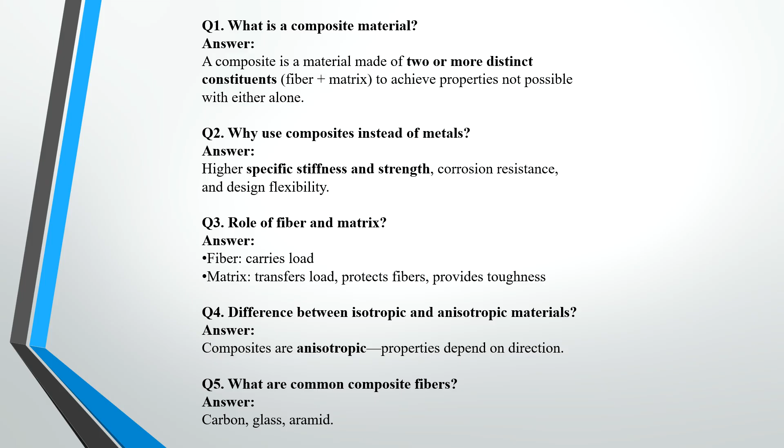Next question is the difference between isotropic and anisotropic materials. Composites are anisotropic; properties depend on the direction. So, what are the common composite fibers? One is glass fiber, carbon fiber, and aramid, which we also call Kevlar. So what are thermoset and thermoplastic composites? Thermoset is non-remeltable and it has very good thermal stability. Thermoplastic is recyclable, tough, and fast processing.

So what is fiber volume fraction? The fraction of fibers in the composite directly controls the stiffness and the strength. Why is void content critical? During manufacturing, some voids will form. So why is the void content important? Because the voids reduce the strength, fatigue life, and the damage tolerance.

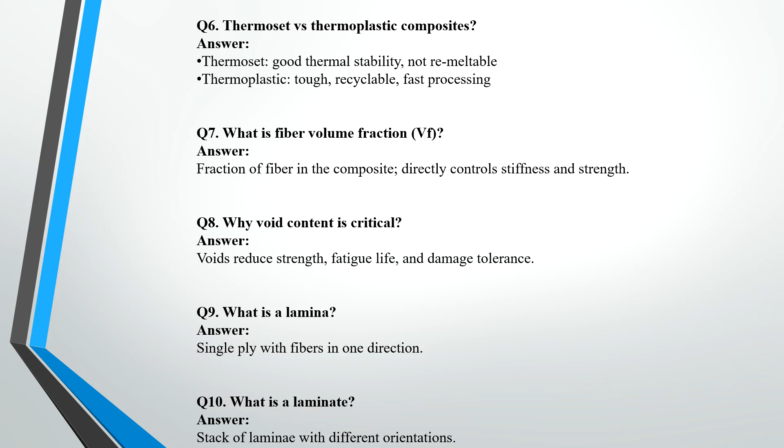So next question is, what is lamina? A lamina is a single ply with fibers in one direction. And a laminate is a stack of laminae with different orientations. So why does ply orientation matter? Because, as I said, this is a direction-dependent property. So it controls the stiffness, strength, and the load path.

And what is a typical fiber orientation in the industries? The typical orientation is 0, plus or minus 45, and 90 degrees. This is also called a quasi-isotropic type of laminate. So this is a common stacking sequence they use in the industries. What is a balanced and symmetric laminate? Balanced means plus or minus theta plies are paired. Symmetric means the plies are mirrored about the mid-plane. Those are called symmetric laminates.

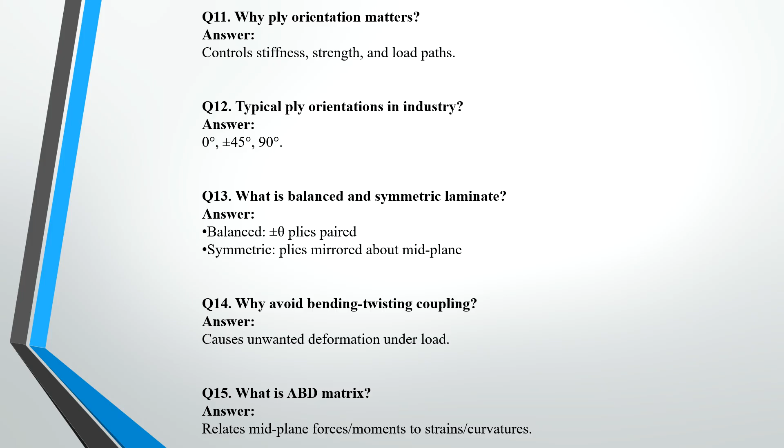Why avoid bending-twisting couplings? Because bending-twisting coupling causes unwanted deformation under load. This is a famous common question they ask in the interview. What is the ABD matrix? It relates the midplane forces or moments to the strains or curvatures. So why is a quasi-isotropic laminate used? Because it provides almost isotropic in-plane behavior. That's why in aerospace industries they use quasi-isotropic laminates.

And what are common composite manufacturing processes? There are many manufacturing techniques. The common ones are hand layup, autoclave, RTM or resin transfer molding, filament winding, and automated fiber placement, AFP. Autoclave versus out of autoclave. Autoclaves are usually used for high quality parts, and are very expensive. Whereas out of autoclave, like hand layup, is cost effective but leads to a higher void risk. So what is prepreg? It's pre-impregnated fibers with controlled resin content.

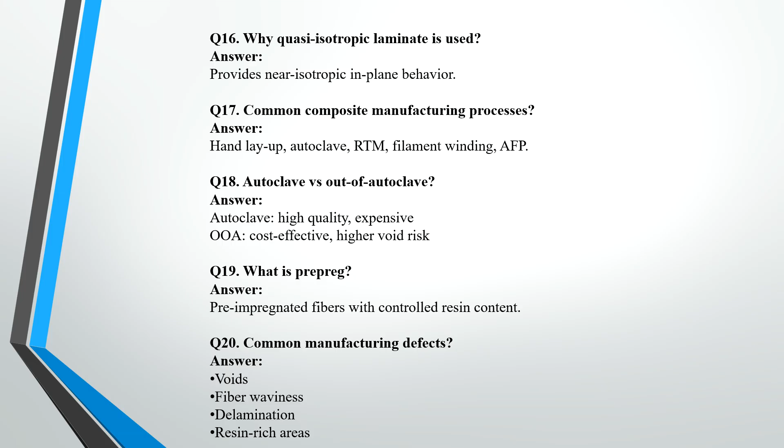And what are the common defects we observe in composites? One is voids, fiber waviness, delamination, and resin-rich areas. What is the effect of fiber waviness? It reduces the compressive strength drastically. What is a cure cycle? It controls the temperature and pressure profile for resin curing. Next, why is moisture absorption an issue? Because it reduces the glass transition temperature and the strength. What is drapability? It's the ability of the fabric to conform to complex shapes.

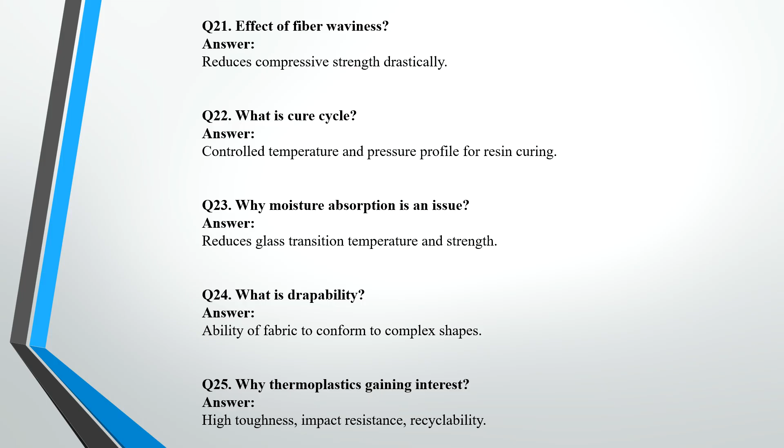So next, why are thermoplastics gaining interest? Because they have high toughness, impact resistance, and they're recyclable. Mostly it's the recyclability. And this is also a very famous question: what are the failure modes in composites? One is fiber breakage, matrix cracking, delamination, and debonding. These are some of the failure modes we observe in composite materials.

So what is the difference between first ply failure and ultimate failure? The first ply failure doesn't mean it's a structural failure, because there are a lot of plies. So once one ply fails, the others can take that load. So we can't say that first ply failure is a failure.

It's not a structural failure. Why is delamination dangerous? Because it reduces the load transfer and the buckling strength. And this is also a very common question.

So, what are the common composite failure criteria? There are so many failure criteria used in aerospace. The common failure criteria are Tsai-Hill, Tsai-Wu, Hashin, and there is Puck. So many criteria are there. I just mentioned two or three. If you answer two or three failure criteria, then the interviewer will be happy.

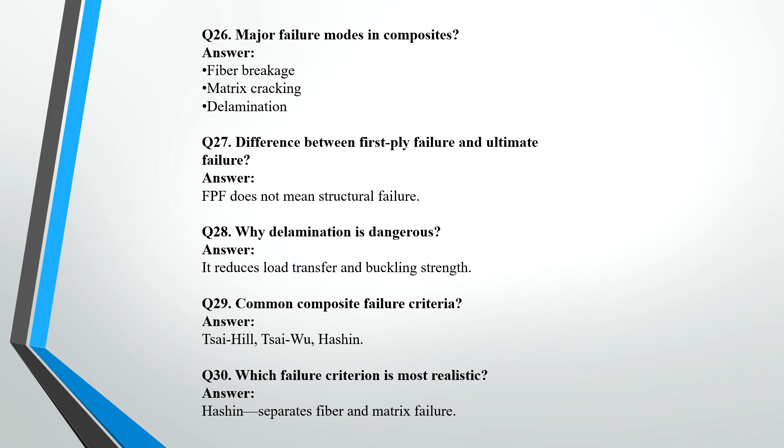So, which failure criterion is more realistic? Hashin. Generally people use Hashin because it separates the fiber and matrix failure. So, the next question is how does composite fatigue differ from metal? This is also a very interesting question. It's a progressive damage instead of single crack growth.

So what is barely visible impact damage? We call it BVID. It means it's a hidden internal damage caused by low energy impact. In composites, when we are conducting any low energy impact test, we can't see the damage inside the fiber or inside the composite laminate. When we do some NDT inspections, then we are able to see the impact damage. So that we call barely visible impact damage.

So the next question is why compression after impact is critical. Composite loses most strength in compression post impact. So we do some residual strength test: we do some impact, then do some compression study, and see what is the residual strength or residual tensile strength, etc.

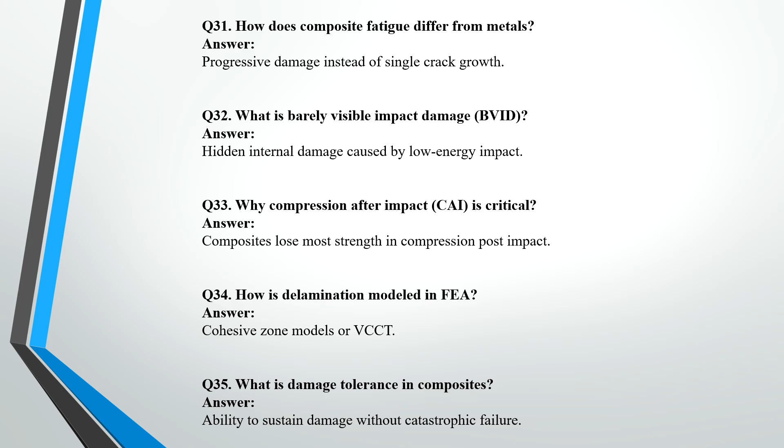So how is delamination modeled in FE? There are two methods: one is cohesive zone models, and VCCT. So what is damage tolerance in composites? Damage tolerance is the ability to sustain damage without catastrophic failure. And this is also a very common question they ask in the interview: what is the rule of mixture? Rule of mixture is nothing but the estimation of composite property from the constituents, from the fiber and the matrix properties.

So what is the limitation of the rule of mixture? The limitation is it does not capture the damage or the manufacturing defects. Shell versus solid modeling for composites, which do we usually use? For thin laminates, we use shell, and for thick laminates, solid elements, solid modeling. And for delamination studies, we use solid modeling for the composite. And what is ply-by-ply versus smeared model? The ply-by-ply is accurate, but computationally it's very expensive.

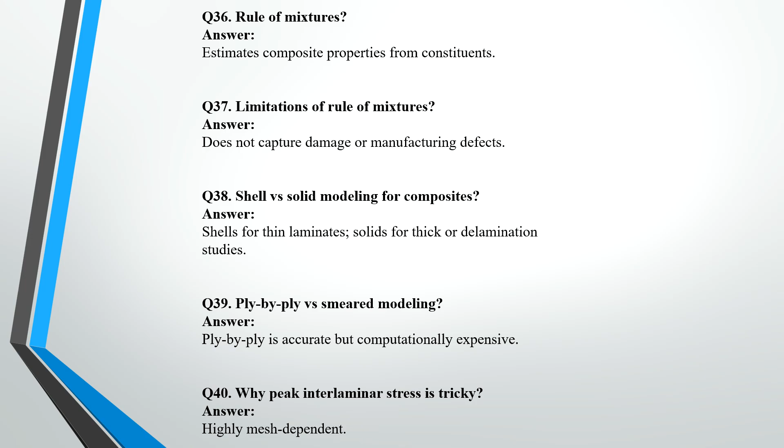So why is peak interlaminar stress tricky? Because it's highly mesh dependent. Because of that it is a bit tricky. So the next question is, how do you validate composite FEA? Correlation with coupon, element, and subcomponent tests. This is how we can validate. So what are knockdown factors? It's a margin applied to account for defects and uncertainty.

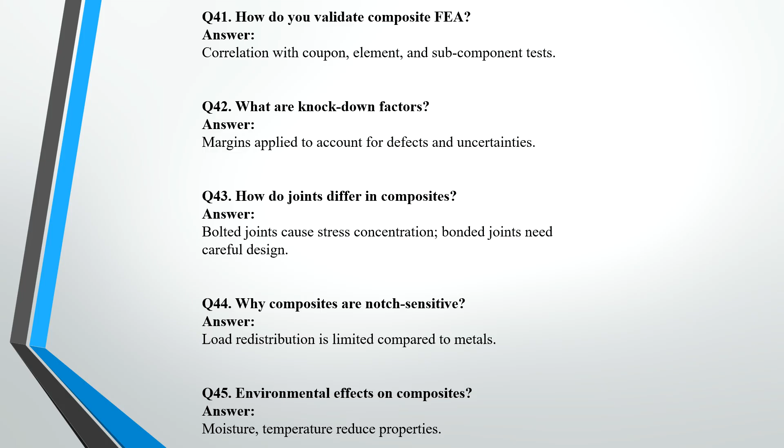How do joints differ in composites? We have bolted joints, which cause stress concentration. The bonded joints need careful designing. So why are composites notch sensitive? Because the load redistribution is limited compared to metals. So the next question is the environmental effect on composites: moisture, temperature. Due to these effects, the composite properties reduce. So this is the effect on composites.

So why is certification of composites costly? Because composites heavily depend on testing. That's why certification of composites is costly. Typical industries that use composites, where are the applications of composites? Aerospace, automotive, wind energy, and marine.

So, what is the biggest mistake in composite design? The biggest mistake is we sometimes treat composites like isotropic metals. So that's the biggest mistake. We should never treat them as isotropic. The behavior is entirely different from isotropic. This is actually orthotropic; it's directional property dependent. So the next is future trends in composites: ceramic matrix composites, automated manufacturing, thermoplastics. These are some of the future trends.

The final question is the one-line industry philosophy: in composites, manufacturing is a part of design. The properties depend on how we lay up the fibers, the stacking sequence, the type of matrix, and the volume fraction of fiber and matrix. All these things matter during manufacturing. So this is a part of design, not an entirely different thing.